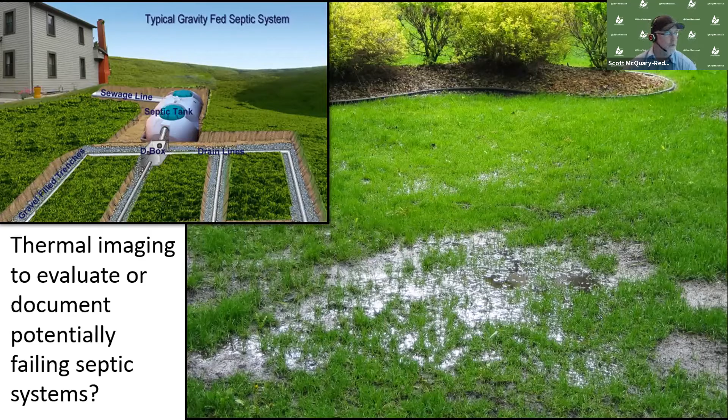But the thermal imaging camera aspect was interesting to me, because at the time I was dealing with a couple failing septic system issues, and I was wondering if I could utilize this technology to evaluate, find, and document these issues with failing septic systems. So that was the impetus of exploring the thermal imaging camera.

Another one of my thoughts was the cross connection aspect—maybe documenting something warm coming in that shouldn't, from an illicit connection inside a building or somewhere, and then documenting that temperature difference with the thermal imaging camera.

It was summertime when I got this camera, and we had a large construction site digging down into the groundwater table to construct an underground parking garage. They were dewatering a massive amount of cool, clean groundwater into the warm Sammamish River, so I took the opportunity to document proof of concept with the thermal imaging camera.

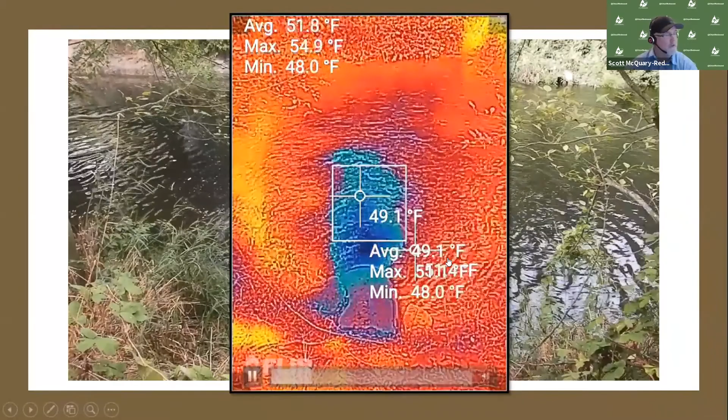You can see the cool water coming out of the outfall into the warmer Sammamish River—the inverse of what you might see from a warm illicit discharge into cooler stormwater, MS4, or receiving waters. At this time of year, the salmon were migrating, and they love to stop at this location and chill out on their way heading upstream.

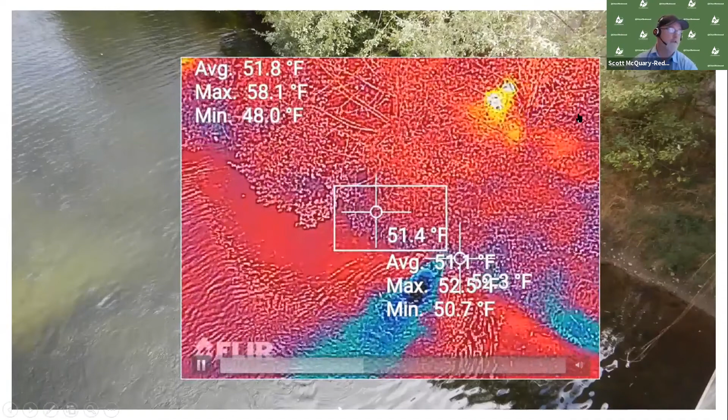This is the same outfall discharging from Redmond Way, and looking down on it you can see the Sammamish River Trail, and the cooler water discharging into the warmer receiving water. It was interesting, I even captured a couple pedestrians, some walkers along the trail up there.

The other tool I wanted to mention was a pneumatic pipe plug. Don't use it very often, but in this particular case, a long time ago, there was a big incident that happened in Redmond. I don't know how many jurisdictions use these as part of their IDDE program or have the option to, but it's basically an industrial balloon.

It's an industrial rubber, ruggedized balloon. One of these balloons can fit several sizes, like from 8-inch to 15-inch or so, so it covers several pipe sizes.

You have this compressed air hose, and you can install the plug from the top side, so you don't have to have anybody crawling down into the structure to insert it into the pipe. Then you have the air release up on the top side too, for when you want to get it out.

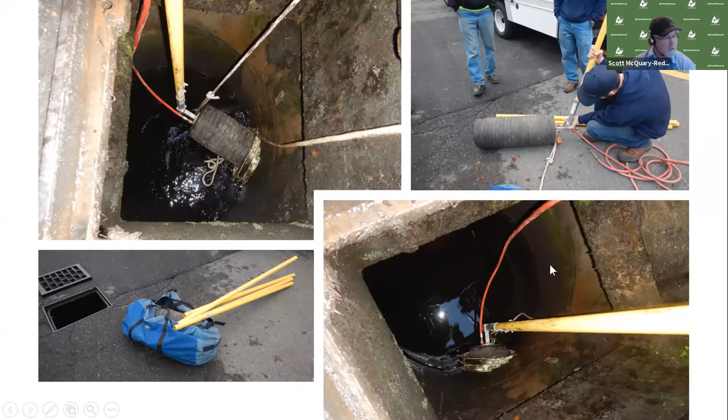This was 2011, just after lunch. I was sitting in my office and heard a boom, and a couple seconds later saw this big plume of smoke about a mile away—a transformer at a substation had caught fire. I figured, uh-oh, I better run over there and check it out; it's likely something Public Works is going to be involved in.

And sure enough, on my way over there, I started getting calls, and I basically called our field stormwater crews and street crews and said, this appears to be an all hands on deck type of incident. And what had happened is this transformer had malfunctioned or blown or caught fire.

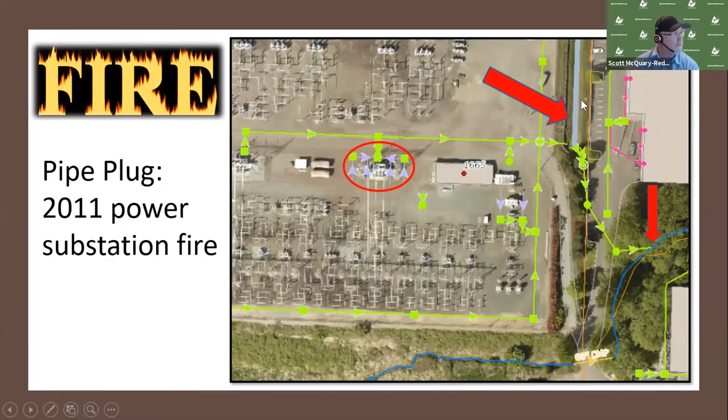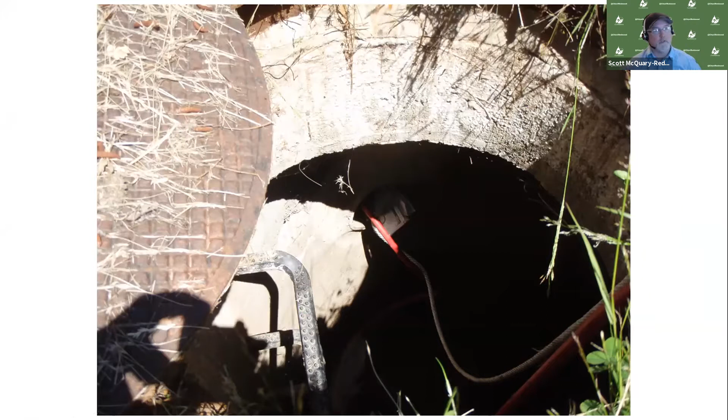So our crews brought the pipe plug, as it was taking some time for the fire department to handle this. There was some issues with their equipment not being able to get close enough to put out the fire. So they had to call SeaTac Airport and request their fire extinguishing truck because it had the range to get close enough to put out the fire.

So in the meantime, we decided let's protect the creek because we think they're likely going to be flowing a lot of water and foam on the fire. So we went back and put in this pipe plug here.

Just some logistical concerns. You want to understand how much water or liquid you're holding with this pipe plug. You don't want too much pressure. You want to understand the pressures behind it. If it's super deep and you have a lot of liquid it's containing, it could build up a lot of pressure behind it.

The other aspect of this is if you have to be able to retrieve it, you have to understand that. Or if it's raining or flooding, and you plug a pipe, you want to understand really well what the impacts of that are. And if it's going to flood upstream, is the material you're trying to contain going to go somewhere else, which is worse?

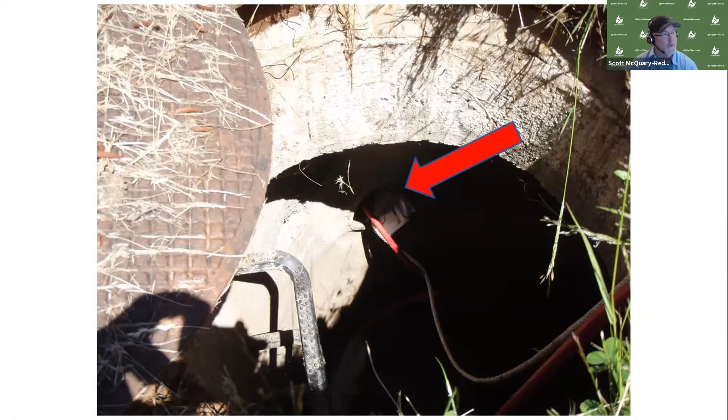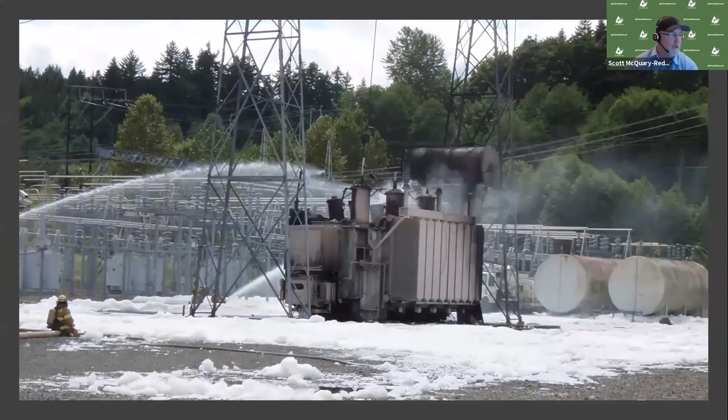So our pipe plug did do some good. And they ran a lot of water on this fire. And I think they were trying to protect what was in these tanks here, maybe mineral oil. But they ran a lot. They were just trying to keep it cool, keep it from igniting again.

And they had all the signal lights out, and there was just a massive traffic jam all over the east side. And the power company's spill cleanup contractor eventually had to be escorted, I think, by state police because they just couldn't get to the site. So the police had to escort them and get them through the traffic jams and through the lights that were all out, signal lights.

But eventually they arrived and started doing their thing, deploying countermeasures, and they brought a Vactor truck out. So this was a lesson I learned during this incident, that a Vactor truck has a kind of a turbine mechanism creating like a Venturi suction effect.

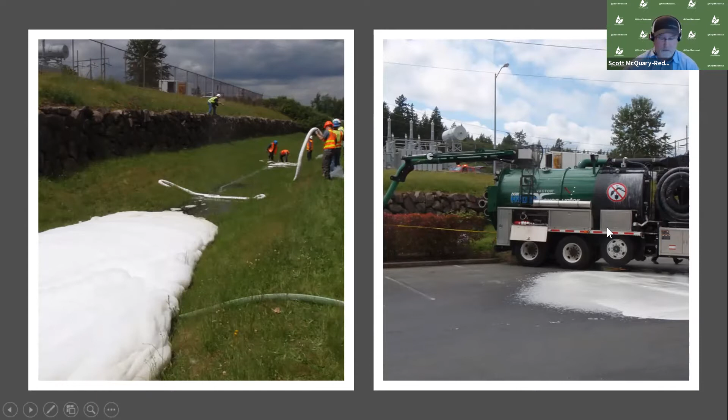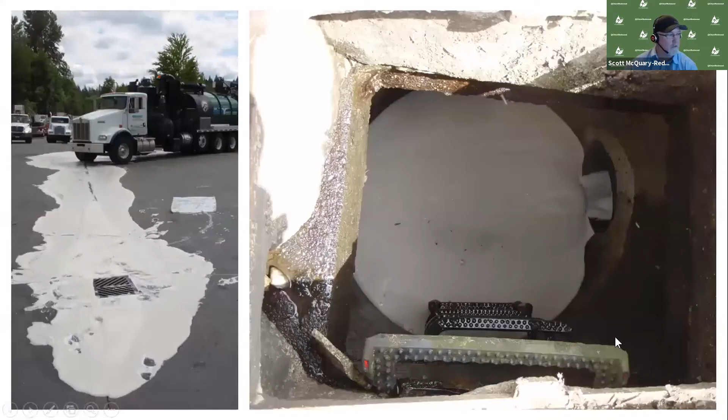And this type of eductor truck, with the high concentration of fire foam, it can begin to cavitate or agitate the high concentration of fire foam. So you'll have it coming out of the vents. In this particular case, we had it contained in the pond and on the site. And then this eductor Vactor truck showed up, and it started spilling it onto an adjacent separate property into somebody else's storm drain and heading towards a different outfall, which was unfortunate.

I told them to buy some time by sucking down the sump pumps of these type 2 manholes, and it allowed us to buy some time, and we were able to contain it in the system. And just a shout out to the spills group back then. They did come out and see how the response was going.

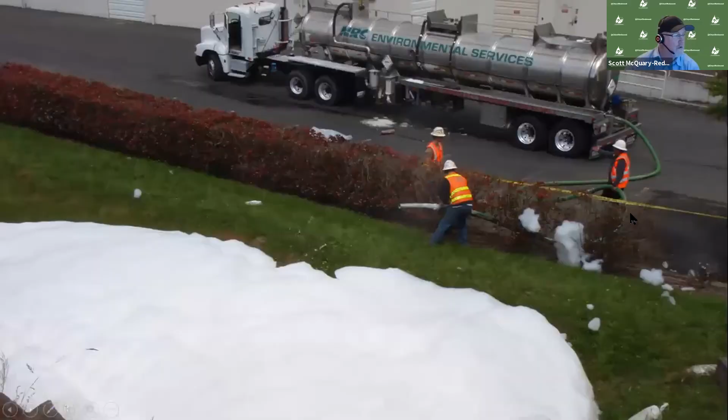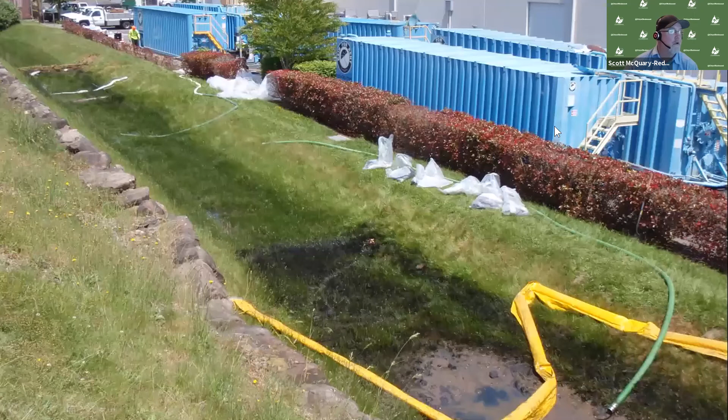So for fire foam, this is the preferred way of sucking up high concentrated fire foam. It's like a septic pumper vacuum system, and it doesn't create the agitation that the eductor trucks do. So they brought out a bunch of these to begin collecting that fire effluent water. This incident was a big cleanup that took many weeks.

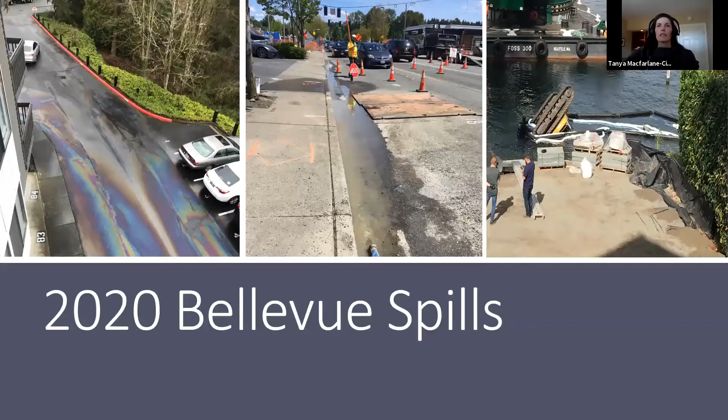So these are just some of the spills that Bellevue had to take care of in this last year. They're pictures that were either given to me by customers or ones that I took myself. And clearly, some of the materials are difficult to clean up, or we can't identify them all.

So as part of our permit requirements for the NPDES permit, Bellevue does some training for staff that responds to spills, and general municipal field staff. This is just an overview of some of the training that our staff attends during any given year.

Today, I'm really just going to briefly touch on the annual HAZWOPER refresher and the basic field awareness. Clearly, other training needs to happen as well, but these are two of the most exciting ones that I think are really important. I'm going to start with the HAZWOPER training.

A number of years ago, Bellevue, Kirkland, and Redmond decided to group up and hire a consultant to do some specific training, because we were doing HAZWOPER training that was more suited for miners or people who work on boats, and not necessarily for municipal staff responding to spills.

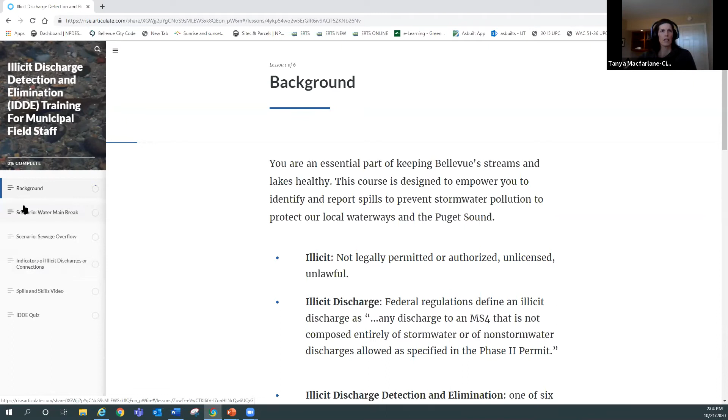So I kind of go through the background of why we do it. It's because we have a permit, and we're required to identify and report illicit discharges. In Bellevue, we don't empower the rest of the staff to report directly, I mean, they can call ecology at any moment in time, but reporting typically goes through our department, which is water quality, because we do investigations. We look at the spill, we try to get cleanup happening, and then we trace it through the storm system and out to see if it hit any waterway. So my biggest deal is just getting all the field staff to funnel all the calls through our water quality staff so we can investigate.

So that's a little bit about that. And then this is one of the scenarios that we built. What's kind of cool about this is that it's interactive. So we've got this water main break scenario, a late night on-call scenario where you show up and you notice there's a huge discharge going into a storm drain. Okay, and then you hit continue.

It says: you're on site to check out a water main break, you notice some liquid draining into the storm drain. You think to yourself, it's probably just water from the break, so it's not a big deal. What do you do? You have these choices you can pick, and if you pick the wrong answer, like 'don't worry about it, the discharge is only potable water running into the drain,' it gives you an answer on how to redirect that thinking.

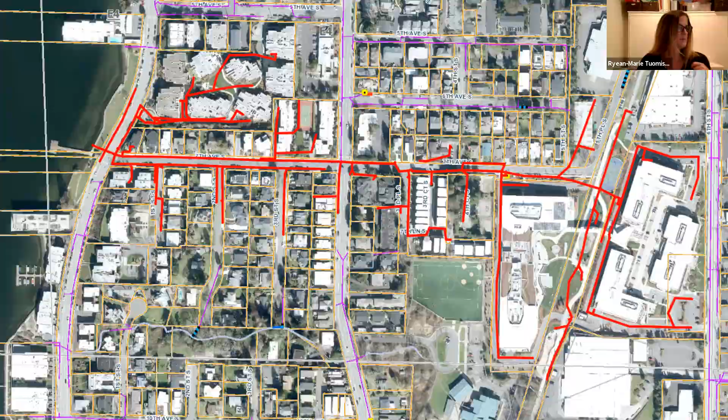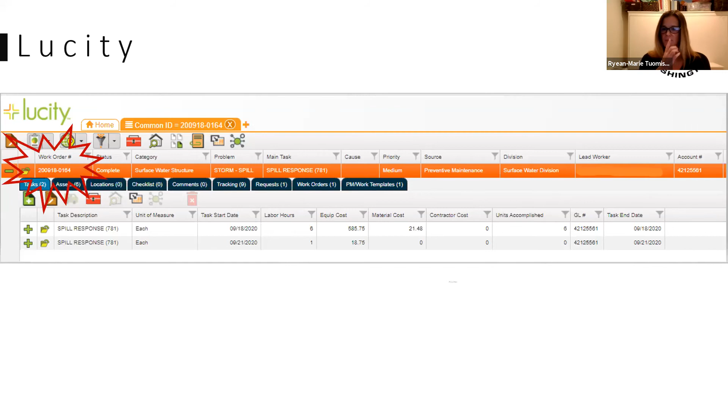As staff are responding, they're creating a work order in Lucity - that's on the top left-hand side there. That Lucity work order number is where all of the activities, the time, the resources, all of the information that maintenance staff are gathering or collecting or doing is stored, as well as the details they're collecting as the first responder of the spill.

This is also where the communication between the maintenance staff and the surface water, the IDDE inspector, starts occurring, and where Lucity and Intergov start communicating. You'll see at the bottom right-hand side of the screen the Intergov number.

So we have - when I say we, I mean our IT folks - been able to get Lucity and Intergov to communicate with each other. Now I'm going to move from Lucity, which was a very high level view, and move into Intergov.

So at this point, our IDDE responders are responding to the spill.

Intergov, just to back up and give you a little information about what Intergov is - for the City of Kirkland, Intergov is the program where all of the permitting and inspection information is stored for development, building, and planning departments.

This is the program where I needed to track and report for our stormwater permit. So with our new permit, I was in Intergov and decided to work with IT to make Intergov work for us, because what I wanted to do is capture Appendix 12 in Intergov.

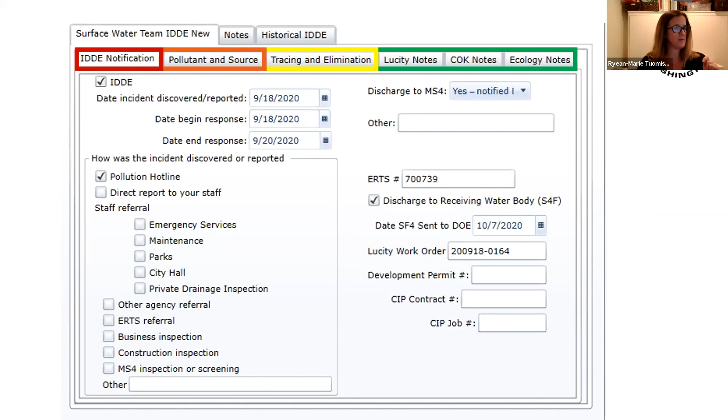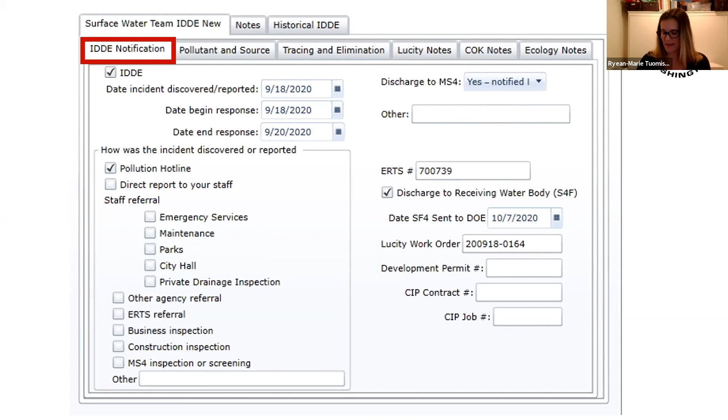The first tab is the IDDE notification. In this tab we're collecting the dates we were notified of the spill, when we responded, and when the spill ended. We're also collecting how the spill was reported to us, as well as other important notification requirements, such as an ERTS number or an S4F mailing. This tab keeps track of notification for us.

The second tab - and you'll notice as we go through these tabs, 95% of the wording is right from Appendix 12. We've added a couple other words where we're curious about additional information, but the majority is mimicked from Appendix 12. This tab is the pollutant identified, source, or cause from Appendix 12. I'll pause and let you guys take a look at the form before moving on.

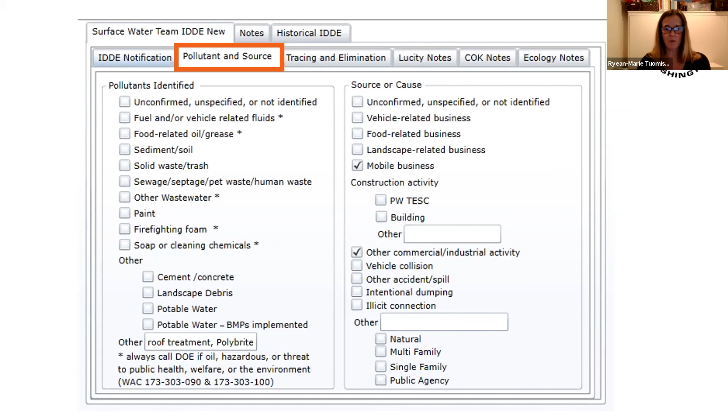The third tab is the source tracing and correction elimination methods. Again, this is just basic information that we accumulate in the fields and use for reporting.

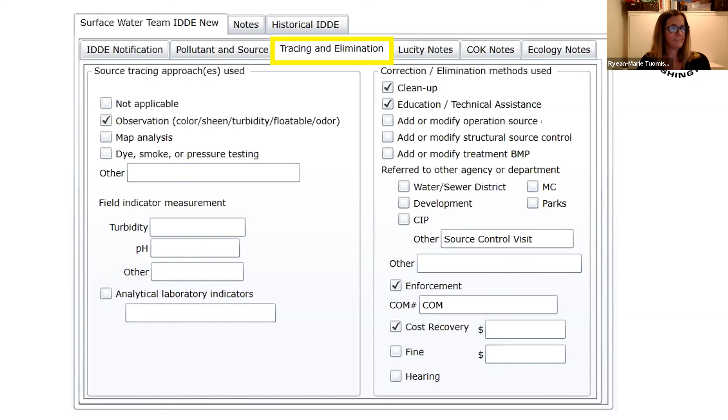The final tabs, which I grouped in green, are all of the notes - it's the workflow, if you will. The Lucity tab is where we're tying it back so these two programs talk to each other, so I can get a snapshot of what the crews did in the field. The COK, City of Kirkland notes, cover all the information of when I made phone calls, left messages, that type of information. And the ecology notes are where I'm telling the story for the Department of Ecology.

To ensure the permit reporting is correct, I routinely do a QA/QC of this data to make sure all the information was inputted correctly. As easy as that seems, we can always hit the wrong button or spell something incorrectly. So I routinely go in and look at a month or a quarter - here's third quarter, and I use this as a snapshot to show you some of the text in red, because it highlights when there are mistakes or information wasn't inputted correctly.

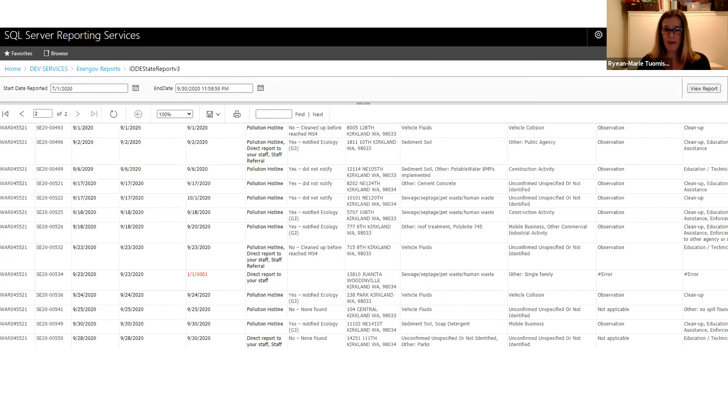After review, the data is put into an electronic format that follows the data schema of Appendix 12. And with a click of a button, it drops right into the Department of Ecology's database.

The form I showed you guys, the tabs that we showed you, seems easy enough, but that was a good 8 to 12 months of data manipulation, summarizing, reporting, and cleaning up. It's about a year's worth of work that we're hoping will make our reporting easier and let us tell the story of our spills very simply and easily. And that is my presentation - do you have any questions?